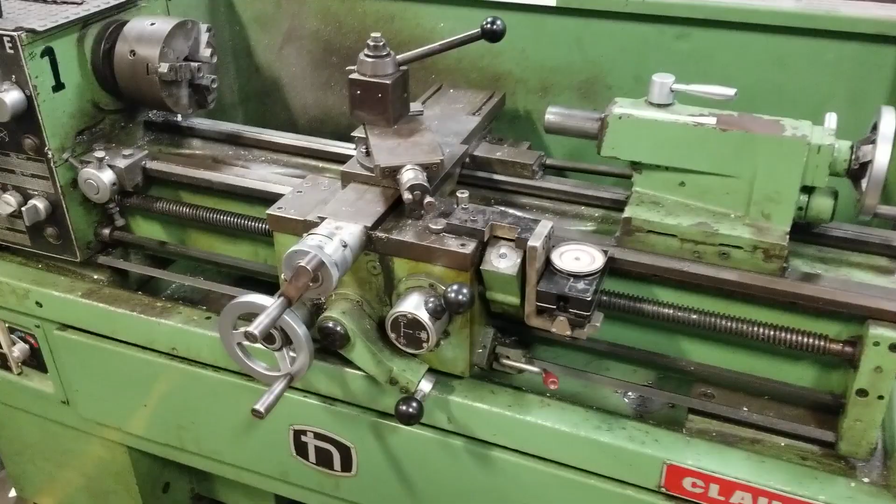Alright, we're going to start some lathe training today. It's really important that you know that these are dangerous machines, and no hoodie ties, even if they are tucked in. No gloves. Tie long hair back, not below your neck.

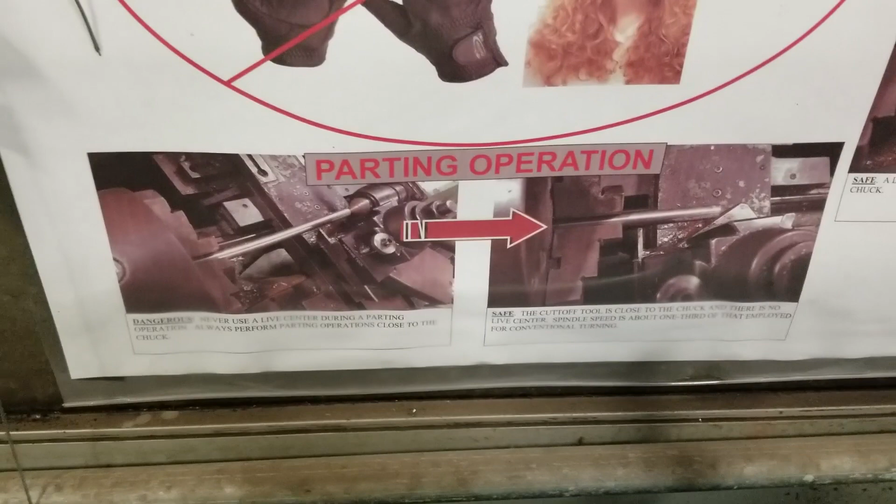Stop machines to remove chips and make adjustments. No earbuds, okay? So we have some other kind of safety warnings right here that you should read, as well as parting. Okay. All right, so it's very important that you constantly think safety. You know, long hair and hoodie ties could really cause a serious accident.

All right, so we have a handout here we're going to be looking at, and you should be trying to memorize the main parts of a lathe. We have 4 different ones. On day 1, you're going to be getting a demonstration from the teacher or a mentor, and then going through some of these pre-item checklist things.

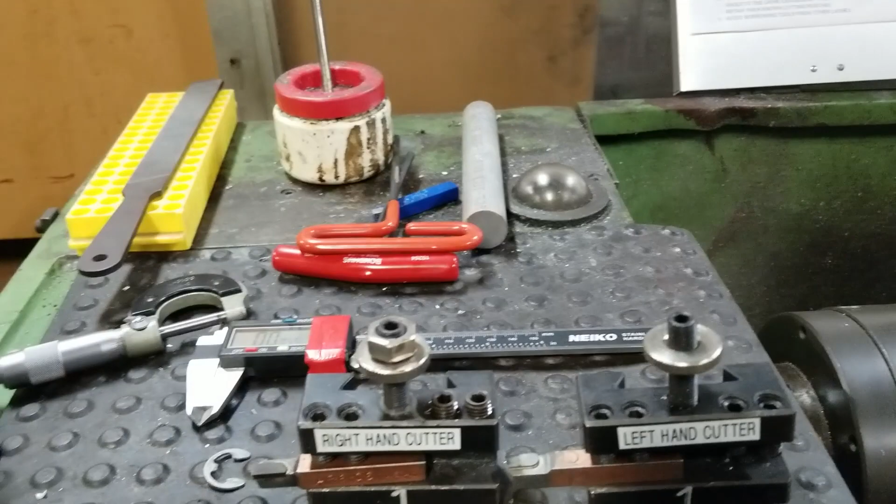One thing is we want to have sharp bits. I'm going to cover that really close. So the ones we're going to be using most is going to be the right hand cutter, also possibly the left hand cutter, the parting tool, and the chamfer as well.

So on this machine right here, there's a power button here, and if you push it this way, it's going to spin like this, and that's what we want to have happen. So I'm going to push it.

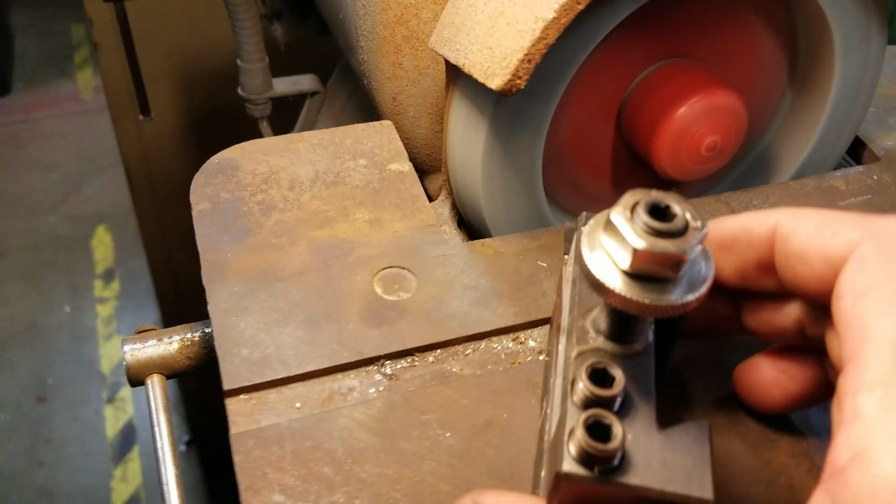You might have to do that more than once, but you want to keep the same angles. Don't make this point round. We'll have a different bit for that. Sometimes also, if there's some stuff on top of here, you can use the extra fine part of the file here and just file the top of this slightly, okay? But make sure you have a sharp tip.

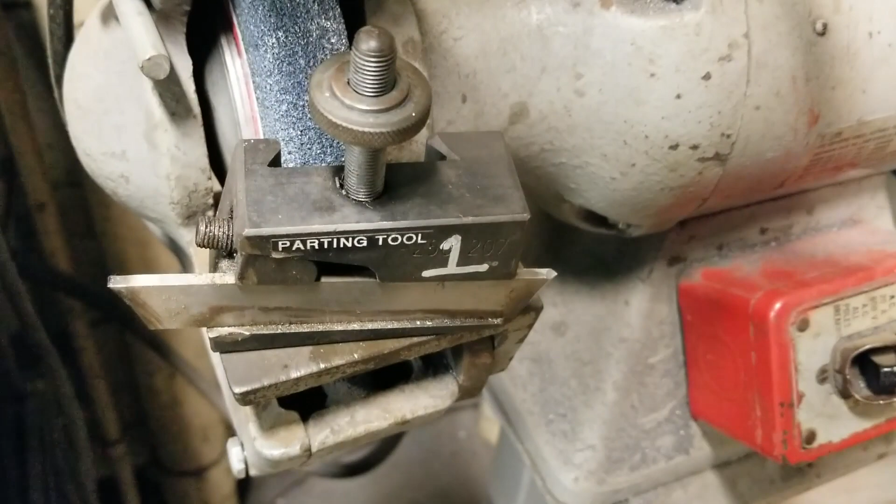On a left-hand cutter, you want to have the button go this way. So like that. Like this, and this side. Okay, here we have the parting tool.

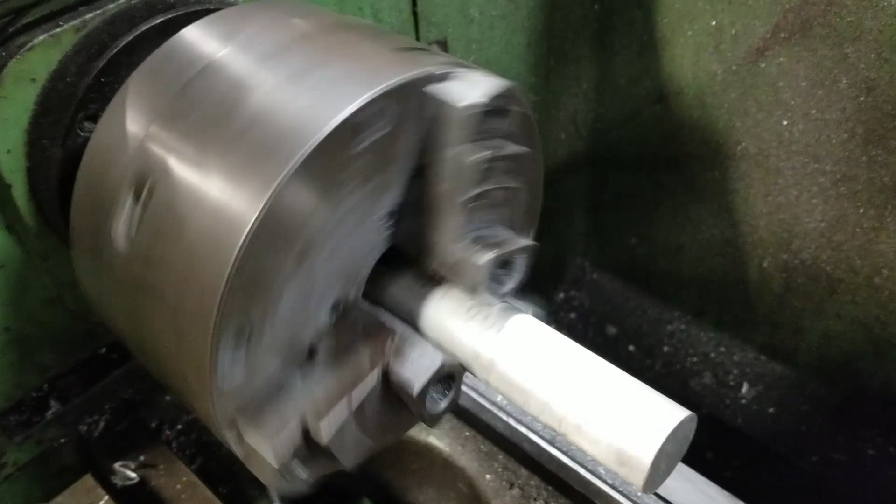And here's your work. This is a 1-inch thick aluminum 6061, and we're going to put it inside of our 3-jaw chuck like this. You want to go ahead and tighten it, and then you want to turn it and make sure it's spinning good. Okay, that's important. Watch this. That's bad. That's very bad. You're going to have an accident like that.

How far to stick out? You can stick out 3 times the diameter, no problem. But if you stick out more than that, if you're sticking out this far, then we have to support this side with a live center, something like this, or a steady rest, which we'll go over later. But always try and have your work be as close in as possible and your cutter close.

So we're going to go ahead and use a right hand cutter. So this is called the quick change tool post, and drop this in, and this knob right here raises and lowers this, and that's important. And you want the quick change post to be this surface right here parallel with this here. So don't have this be an angle. On this project, you really should not have to ever loosen this. So just keep this perpendicular.

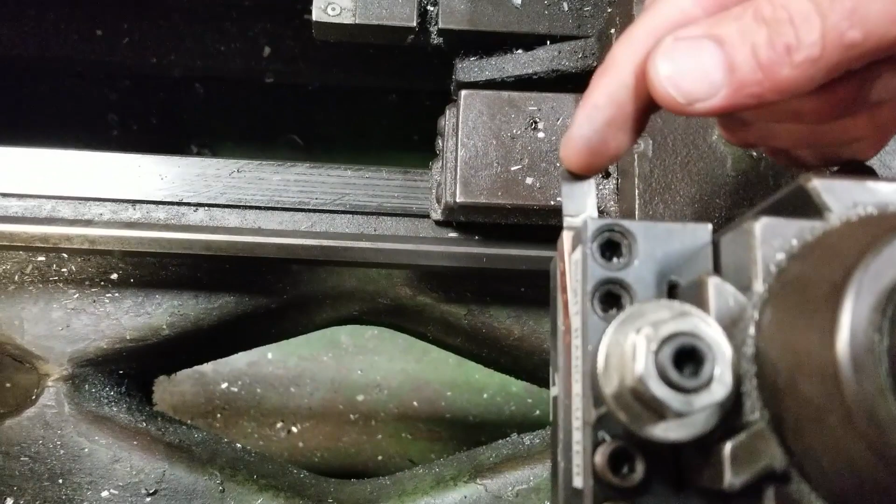And this cutter right here should be angled a little bit out like this, which you can see it is. It's going to cut perfect. So now we need to level out the tool. So I put in a straight piece of metal here. What you want to look at is: is this level? And the answer is no, it's not right now. So you're going to raise and lower this screw right here until it looks vertical. Okay, so that's good.

Once that is set, you want to take this and lock it in. So now you can see that by pulling this, this is locked in. This screw here is tight. The compound rest is tight. This bolt right here is tight, as well as this one right here. My work is tight. You spin it by hand and it's spinning good.

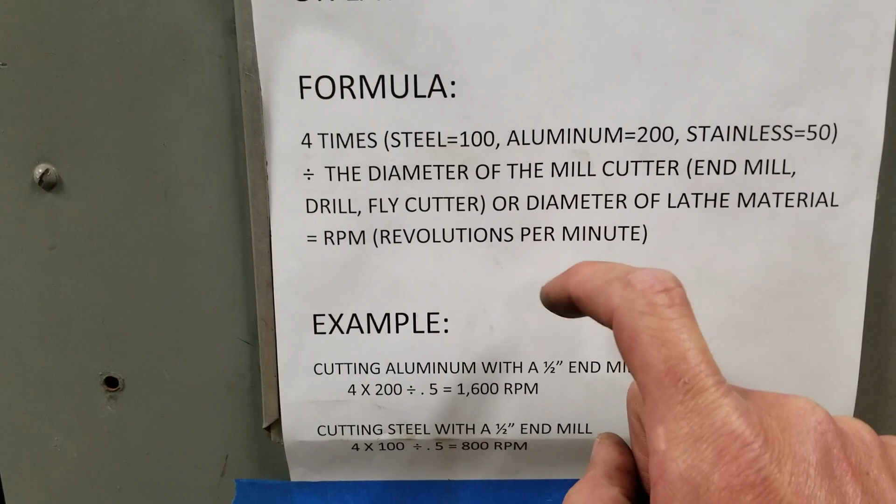Okay, how fast should you spin the machine? So we're going to go 4 times 200, and we're going to divide that by the diameter of the material. Okay, that's the speed you're going to cut at, and that's going to equal your revolutions per minute.

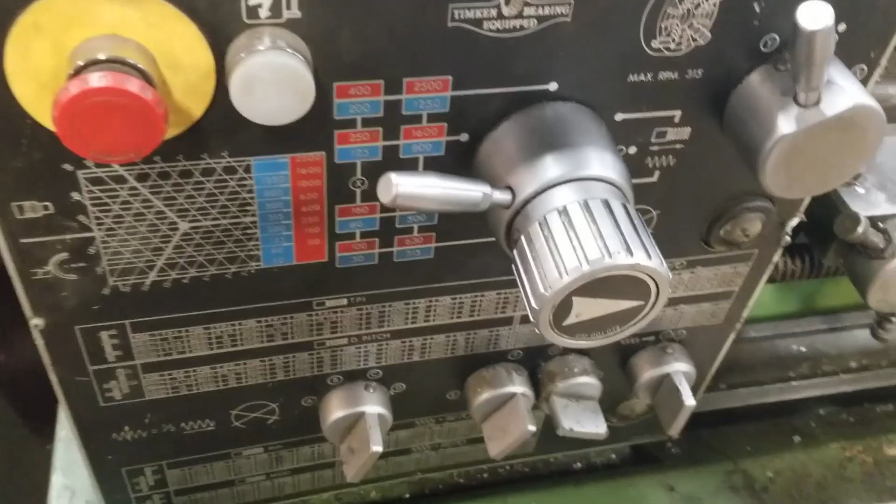Here's 2 examples here. I would say for almost the entire thing, we're going to always be spinning it in the forward direction. So this right here is forward. Sometimes, it's pretty rare, we might go in the reverse direction, maybe for doing some threading operations. As far as setting the speed goes, there's lots of numbers here for speed. So here's 800, and so I'm going to move this knob right here.

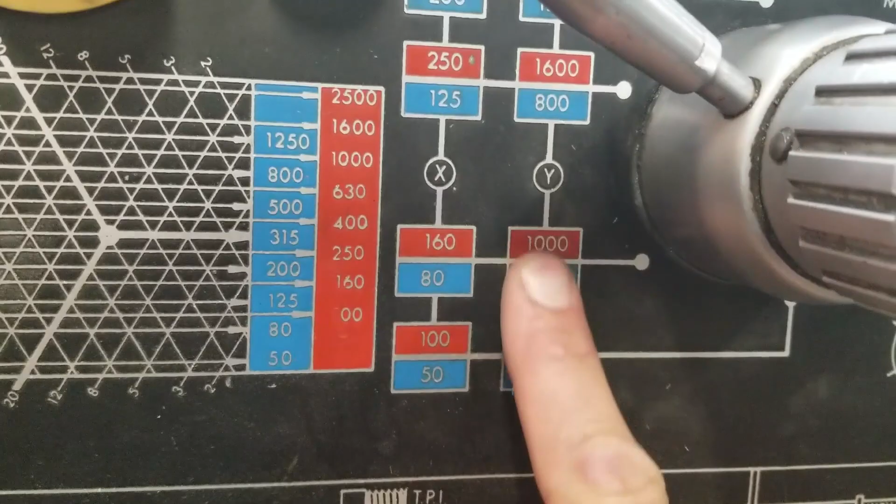Here's 800. I'm going to move this knob so that it's in line with it. And if it doesn't want to move, you might have to move the chuck a little bit. So it's an 800. You can see it says Y right there. And over here, it says Y. And so this whole column right here is Y. This one's X. And then you can see 800 is a blue number. And down here, we're in blue.

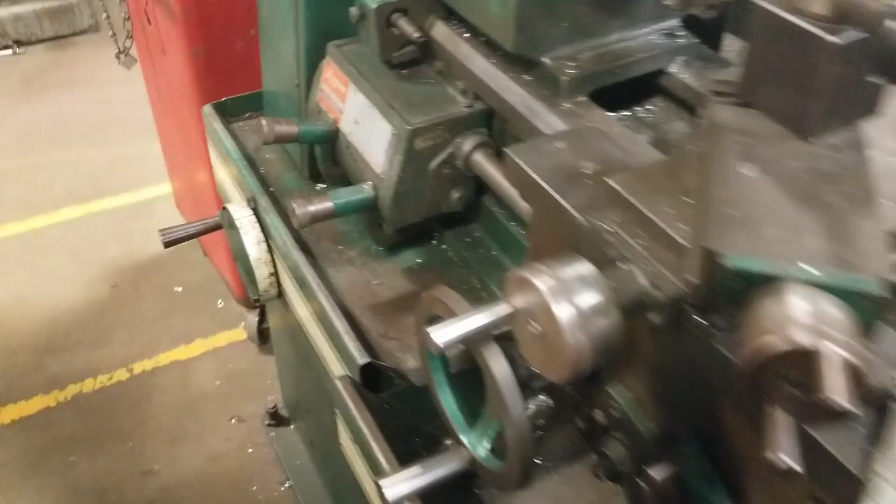And so on this machine right here, if we turn this knob down, it's going forward. Move it up, which you don't want to do, is reverse. So that's forward. Over on these 2 machines right here, you can see we have forward, reverse. You want to be on forward. The speed is changed down here while the machine is on, but these are worn out, so it's mainly kind of going by experience and how it sounds and how it looks.

On this LeBlond machine right here, we have forward and reverse. So I'll do forward. And then this is our on-off handle. Or down here, to change the speed, this is the number here. So if I want to go down, just let it do that back and forth for about 2 seconds. So if I want to change speed, that's it. That's how that works.

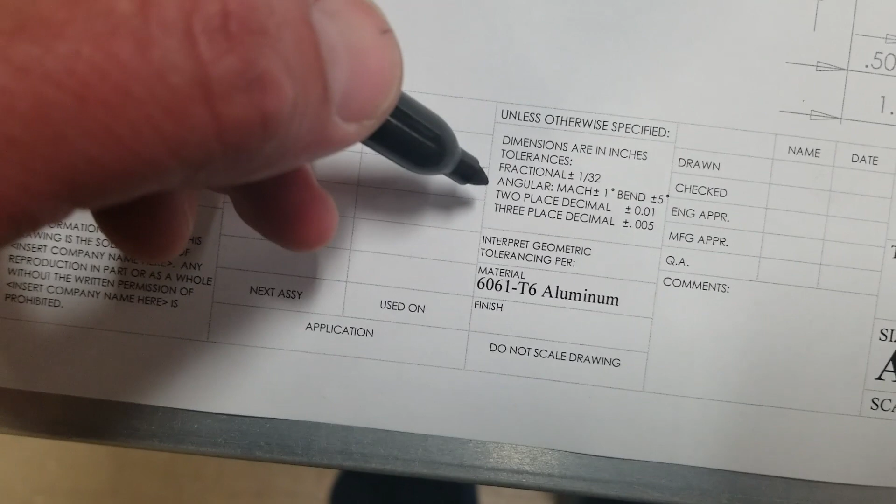All right, here is your project plan, your engineering drawing. And it's important with your dimensions, you really try and be accurate. Down here it tells you if there's 2 decimal places, you can be within 10 thousandths, 3 decimal places, 5 thousandths, okay? So the first thing we're going to do today is this cap, this cap right here.

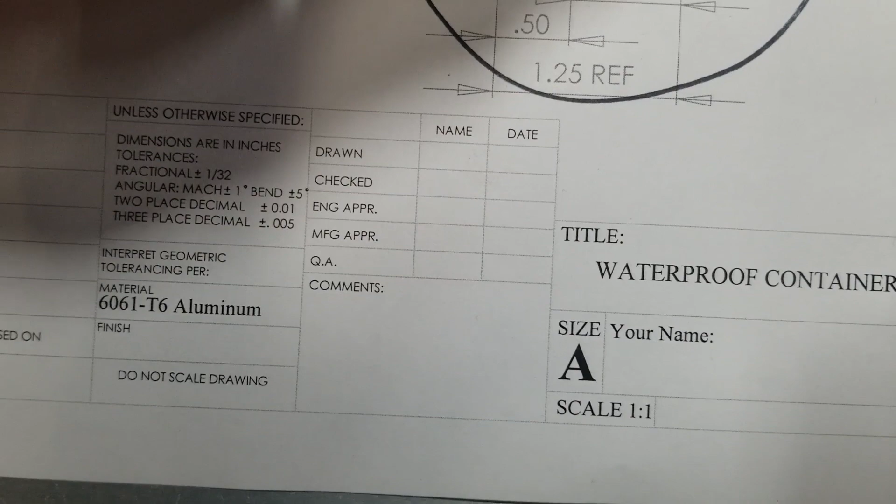And what's important to know is this right here, that it's 3/4 from here to here, and it's 3/4 thick. Okay, so it's 3/4 from there to there, and 3/4 from there to there, or we could say 750 thousandths. So that's what we're gonna make first, and you should go through these safety procedures each day. It's very important for your safety.

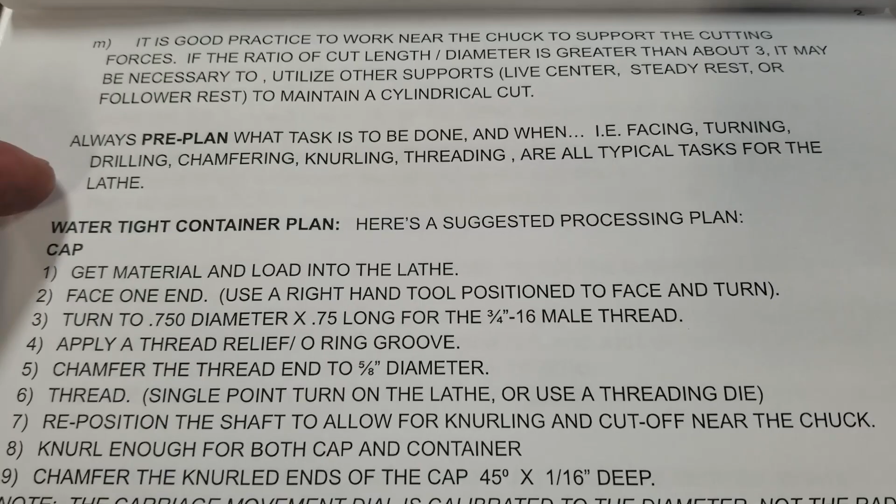All right, so we're always going to try and pre-plan what you're going to be doing. Get a plan, do your operations in the best order to get done the quickest, most efficient way possible. This here is a suggested plan for a beginner. It's not the only way to do it, but it's a good way. So we've got the material, and we're going to face one end with a right-hand cutter.

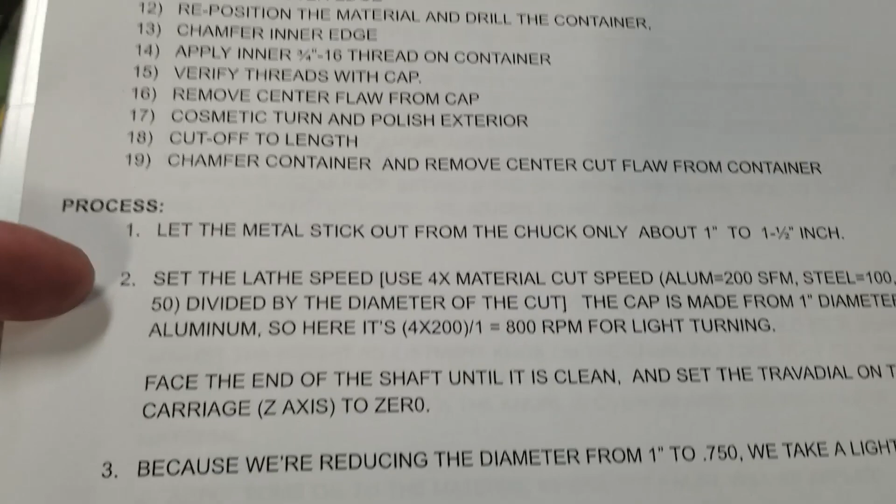And you'll notice that for each one of these main parts, down here is the process explaining exactly what to do. So if you read just this here, unless you're experienced on a lathe, you're not going to know what to do. So you want to read step 1 and then go down here to process 1. Okay, we did the speed. We're going to face the end of it until it's clean and set the travel dial to 0. So we're going to do number 2 right now. Okay, so here it is. And I'm going to turn the machine on.

So the end's done. So now with the travel dial right here, I'm going to go ahead and set this to 0. So what you want to do is move it until both dials are moving, the inner dial and the outer dial. First set the inner dial so that the black needle is at 0. And then move the other direction. So now the outer dial, the red needle is with the 0 there. Okay, so that's how that's set.

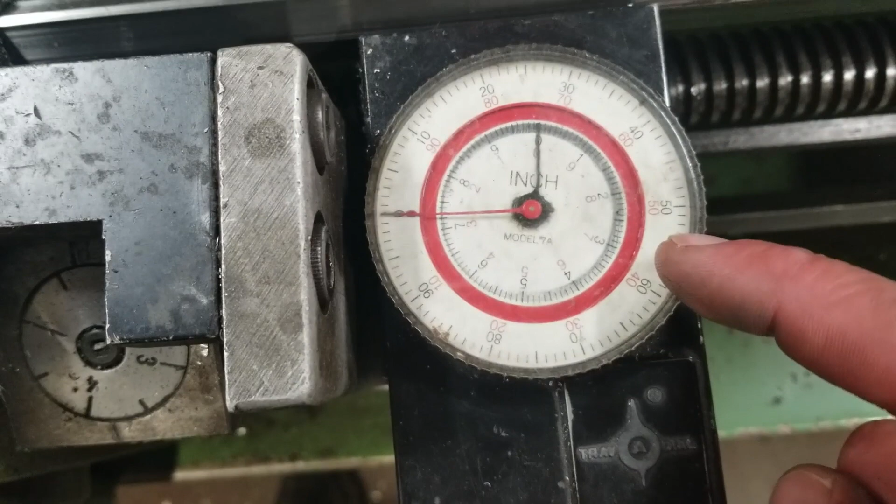On the outer dial, each mark is 1/1000th of an inch. On the inner dial, it's 1 inch between the 0 and 1. So if you need to go several inches, you could look at the inner dial to move quickly. Okay, so now I'm going to go ahead and back this out here. The travel dial is set. So now I'm going to move this knob right here over clockwise.

100 thousandths, 200 thousandths, 300 thousandths, 4, 5, 6, 7, 750, we're going to stop. 750.

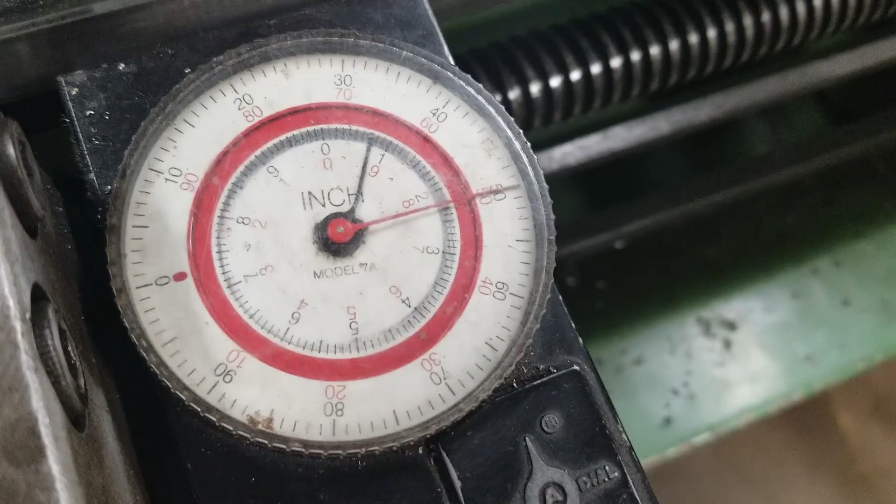So that's what just happened right there. Now what I'm going to do is not move this knob right here, so I'm going to loosen this little set screw. Without touching this—it's really important I don't touch this—I'm going to go ahead and set this guy at 0, and lock in this knob right here. Alright, so that's set at 0.

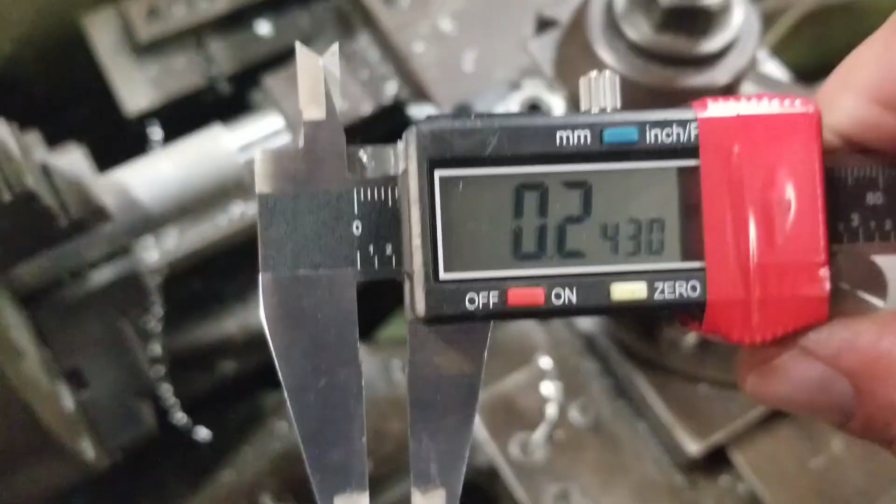That's important. So now when I move my work over here, alright, here's our digital caliper. I'm going to go ahead and turn it on, make sure it's in IN for inches. So that's fraction, millimeters, IN—that's what we want. We're going to close it, then click the 0 button if it's not 0. So that's zeroed. Now we're going to take a measurement.

So you can see I have 956 thousandths. Okay, so what I want to do is get to 750 thousandths. So, 0.956 minus 0.750 is 206 thousandths. That's how much I need to take off.

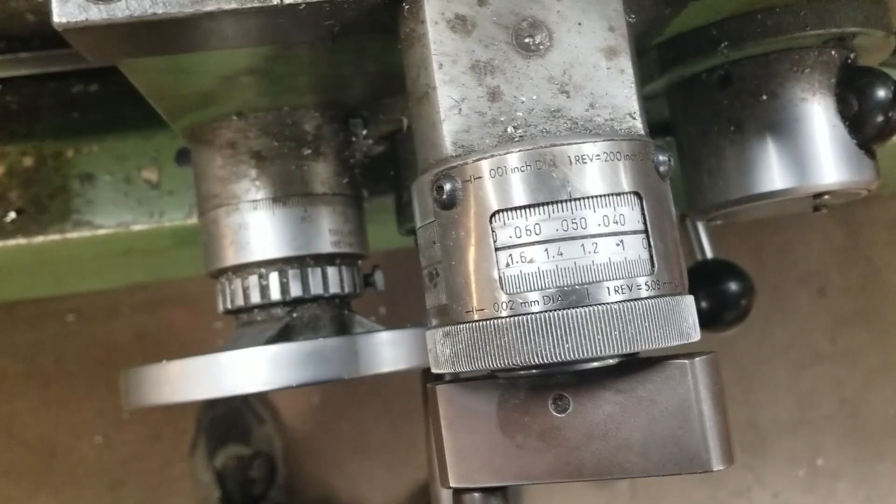Okay, so what I can do now is go in, let's say 50 thousandths, and do a cut. And I could go in another 50. Could go in more, less—just kind of getting a feel for it.

So now we'll stop and take a measurement here. I've gone in 150 thousandths, so I should have about 56 thousandths more to go. Let's go ahead and just see. This is saying—because the dials here aren't always perfect, it has to do with how soft your material is, the machine, the force, the speed, a bunch of things—but it's saying right now I'm at 806 thousandths, so I have to take off 56. You can see it's pretty good.

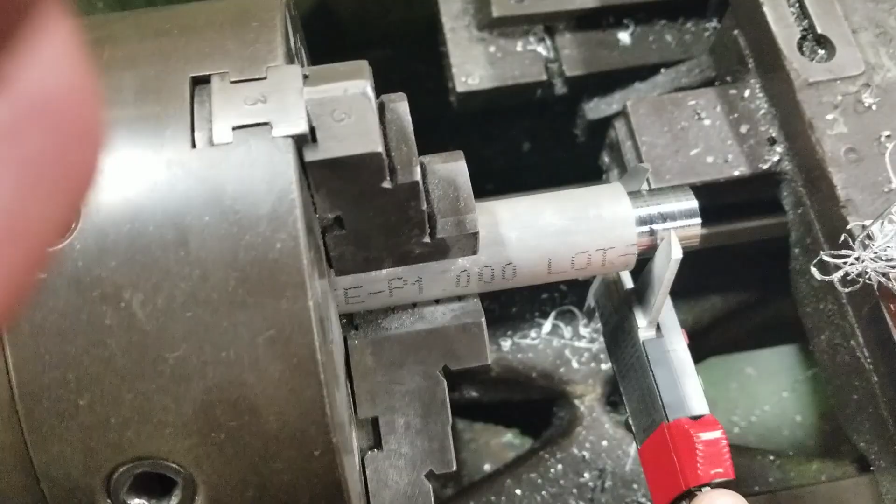We want our finishing pass to be taking off just a couple thousandths, so keep that in mind. So I have to take off 56 thousandths, so I'm going to go ahead and take off 50. Just to be safe, I'll do another measurement because I really want to get this guy at 750. It's saying I have 9 thousandths to go here, so I'll do about 6 or so.

Alright, so basically you can do this. Had a nice finishing pass there—I just took off a few thousandths. Got 5 more to go. Alright, so I'm really close here, just have about 2 thousandths to go. Alright, and we got it right there.

Okay, I've put in a sharp parting tool, and I made sure again that this piece of metal is vertical—it's really important here. Alright, so we're on page 2. We did all this right here. Now we're on step 4. I'm going to go ahead and mount a parting tool. We're going to do an O-ring groove to 625 thousandths.

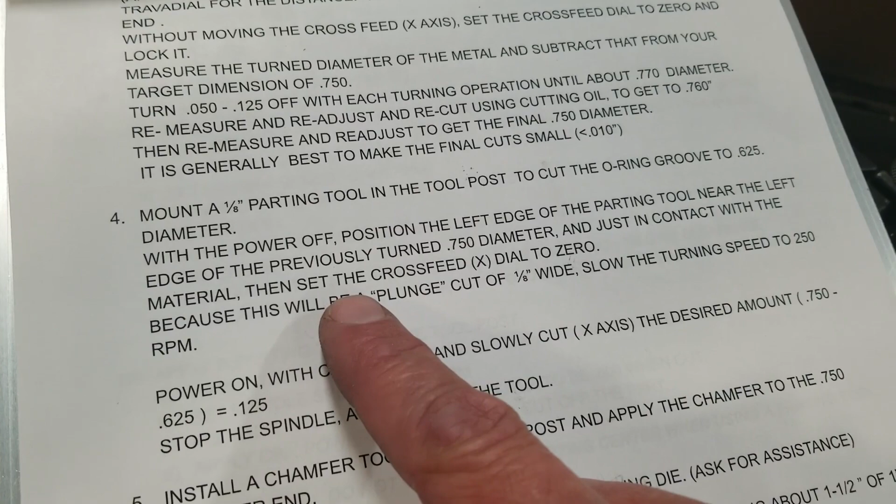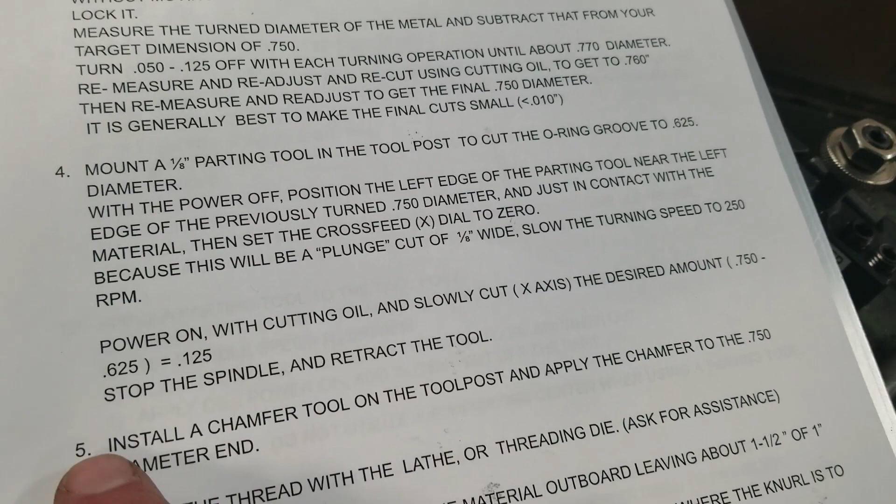So as far as getting the machine down to a lower speed, this machine is really pretty easy—just got to find a number that's around 250. I see it right there. Okay, I'm already in the right position there. You can see it's in the X there, so I have to go over there. So that's X, and you can see that the 250 is a red number, so I have to go to the red number.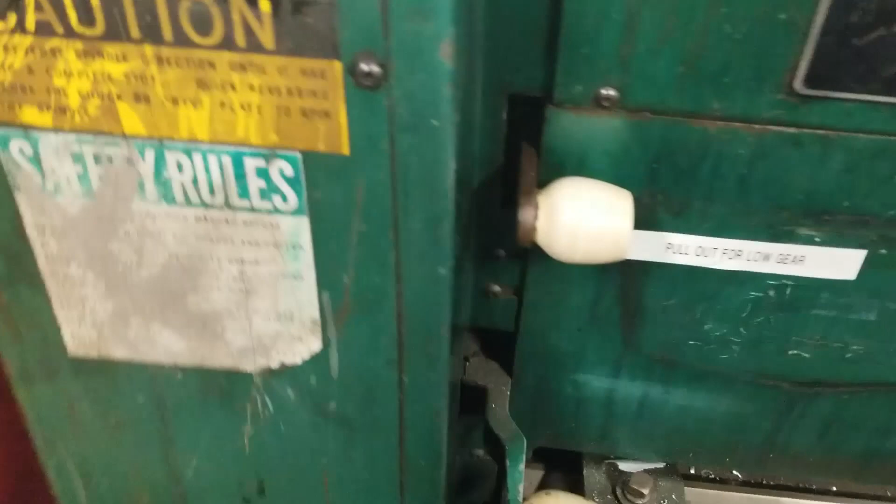On these two machines right here, what you have to do is, back here, there's some pins, and you have to pull these pins out. So the pins are out, and now it says pull out for low gear. So pull this out, and now we're in low.

Alright, so I've got this parting tool up against my metal with the power off. I'm going to find my set screw here and set this guy at 0. So that's set at 0. At this point I could go back a revolution, and if you have some kind of a little bit of an angle right here, you're going to go ahead and try to get rid of that angle.

So again, the tool is in tight. The tool is in tight. Could use a little bit of cutting fluid right here. And we're going to go in 125 thousandths. And back at 0—so I'm going to go in here.

If you want, we could just go ahead and take a quick measurement to get the right desired diameter. All right, so we've gone in just about 125 thousandths, measured it, and it's right there. So that's what you want to do.

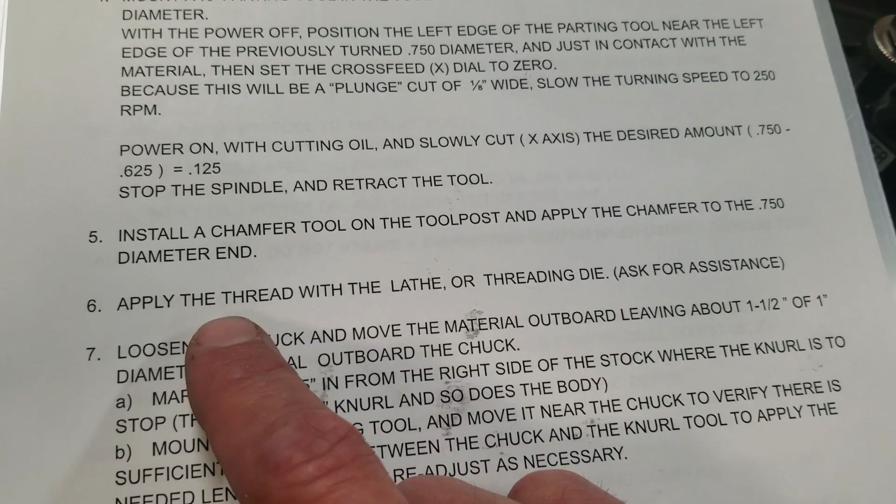Get that at 625 thousandths for the O-ring groove. Now what we're going to do is install the chamfer tool in the tool post and apply the chamfer to the diameter end. Then we're going to apply the thread with the lathe or threading die.

Just look at the plan here. We know that we have a 1/8 inch parting tool, which is 0.125. It says here, O-ring groove 1/8 parting tool, diameter 625 thousandths. So that's what we did. And we're going to apply a chamfer on this end right here and then cut the threads.

All right, I have the chamfer tool installed. It's locked in, it's level, and basically it's right here. We're just going to go in. Also use the cross feed here too.

Alright, so a chamfer basically takes the sharp edge off the metal. In this case, we're going to be putting a die on here. It's going to help it get started more easily than if you didn't have a chamfer.

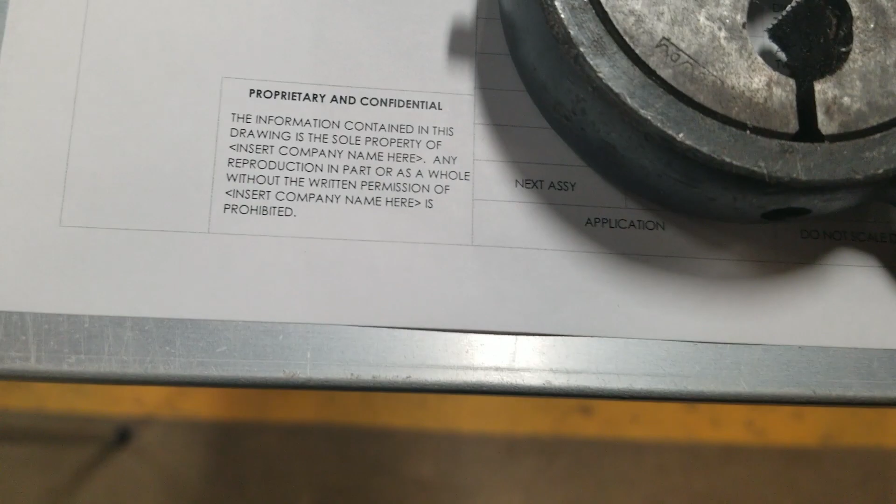Now here in the plan it says 3/4-16. What that means, you want to have the diameter of threads be 3/4, and then there's 16 threads in 1 inch. If you look at this die right here, it says 3/4 right there, national fine, and then 16. So this is definitely the right one. Look at it too. You can tell that in this area right here, it's going to first get the threads started, and then towards the second half, it really cuts real threads.

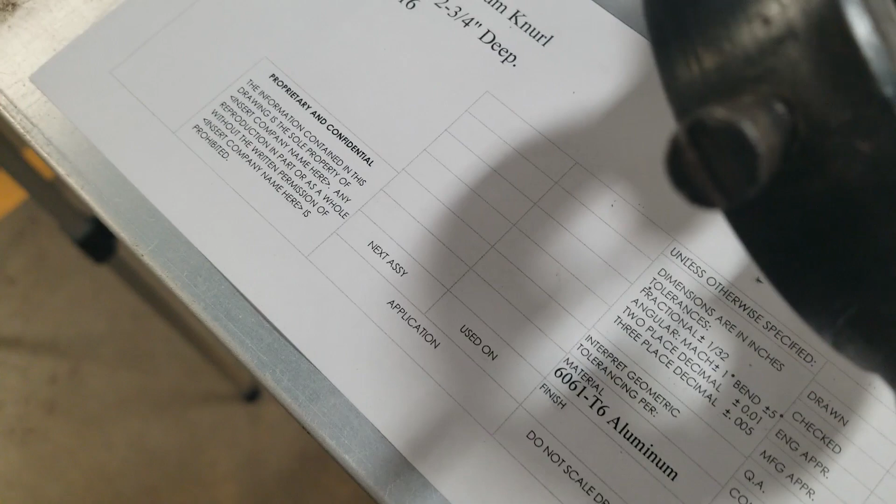So we're going to have our end touch this side. Okay, so what I've done here is I have the die set up here. This is called the tailstock. I had to loosen this, move the tailstock over with my hand. You want to have this loose. On this tailstock, this is what tightens and loosens it. So you'd move it over, tighten this, make sure this is just a tad bit loose so this works right here. And then on this tailstock, there's a button down here that locks it in, unlocks it, and then this should be a tad bit loose.

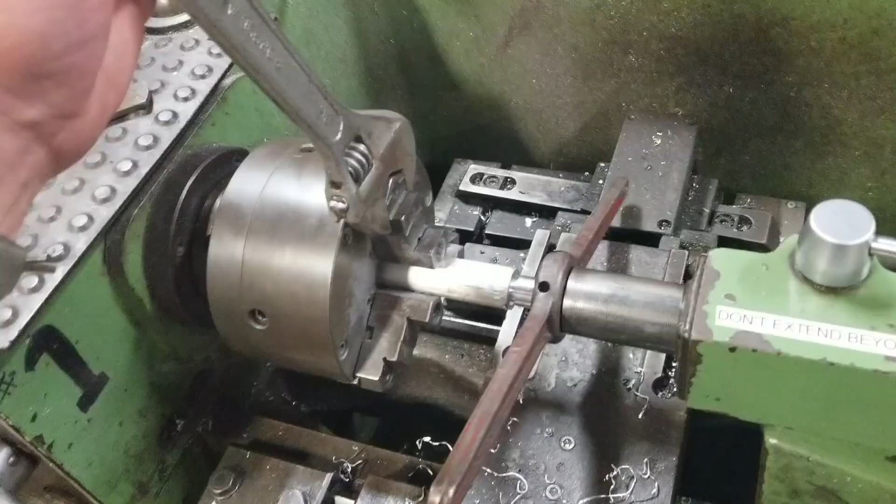All right, we're going to cut the threads now. It's going to be a little hard to do this one-handed, but before we start, it'd be a good idea to get some cutting fluid on that.

And what we want to do this whole time is maintain a little bit of pressure with this going this way, so this is going to keep it. We want this to be a little bit of tension there. And then we're going to have an adjustable wrench going here, and we're going to cut the threads a little bit like that, and then a little bit of tension. Cut threads, and then a little bit of tension.

Now, after it gets started, it's going to take more force. So I'm going to cut the threads, and then you want to move it back up here to release the threads into the flutes of the die, get back where you started, and then apply a little bit of pressure right here, and keep doing that.

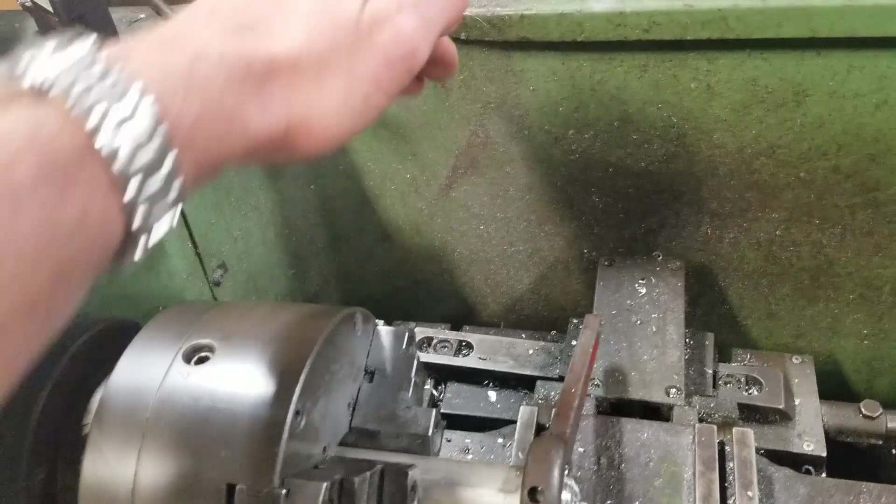All right, I could just feel myself going past the O-ring groove, and now really I can't go anymore. It's stopped against that edge. So now I'm going to back it out. What we're going to do is pull this back, take the wrench off, and then you might be able to use your hand, but basically we're going to just move the chuck this way and reverse with no power and get it off.

All right, so you can see it's coming off here, just like that, no power. All right, here's what it looks like. To clean it up a little bit, but basically I got my threads done.

On your next lathe project, or Metals 2, we will basically cut the threads with a thread cutter, and that's why all these numbers and stuff are here, because if you want to do a 3/4-16 thread, you can set these dials so the machine will do that for you. But that's for a different lesson.

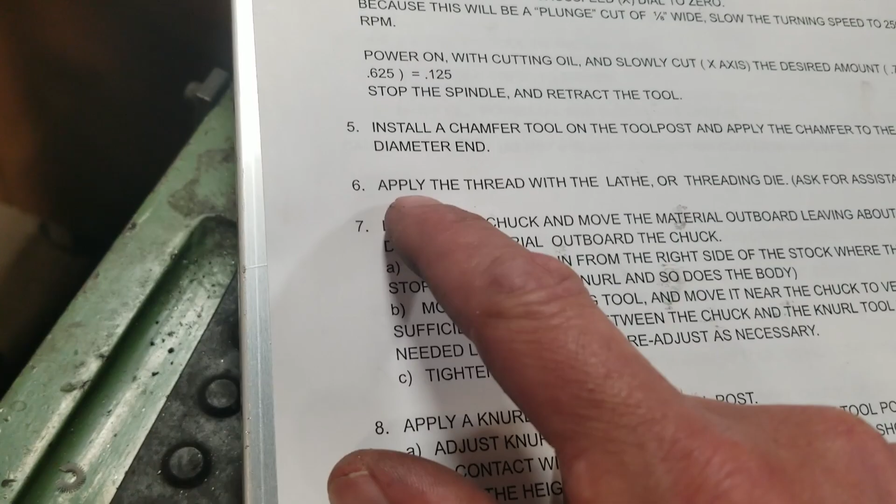All right, so we just completed step number 6. If we're going to 7, let's just see where we're at. This is kind of talking about knurling. So you can see that we've basically faced it, we turned it down, we did the chamfer, we just did step number 6. So now we're on step number 7. We're going to reposition the shaft and do our knurling. So here we are, step 7.

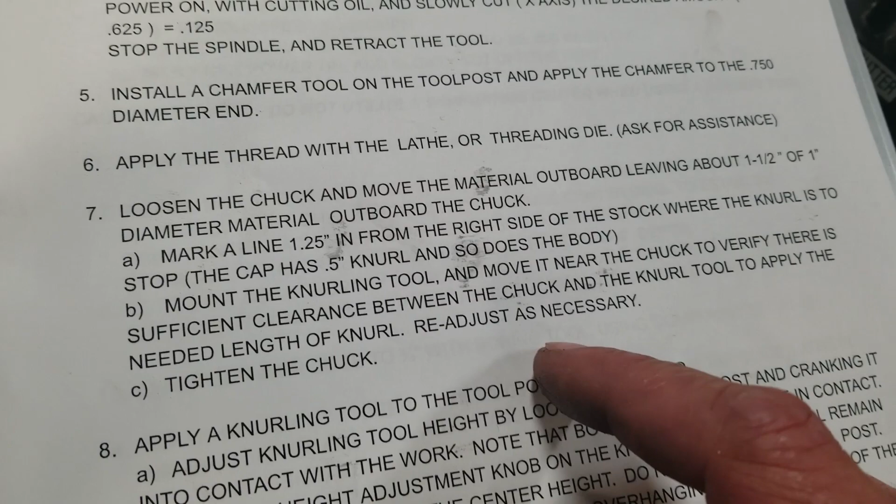So basically loosen the chuck and move the material outboard, leaving about 1.5 of 1 inch diameter of material outboard the chuck. But let's pause here. We're actually going to want to do a 1/2 inch of knurl here and a 1/2 inch here, so that's 1 inch of knurl. We'll have to part them, that's 1/8 of an inch. So we're actually going to knurl 1.25 inches of knurl. That's what we're going to do, so we can get both done in one operation.

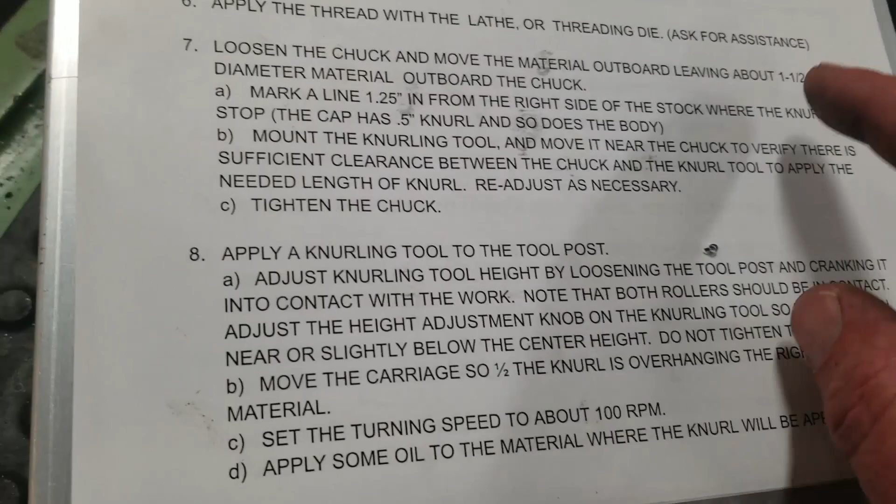Alright, so going to have about 1.5 inches out. Like it says, we're going to knurl about 1 1/4, make a little line, and mark a line 1.25 inches from the right side of the stock where the knurl is to stop. Mount the knurling tool, move it near the chuck to verify there's sufficient clearance between the chuck and the knurling tool, and apply the needed length of knurl. Readjust as necessary, tighten the chuck.

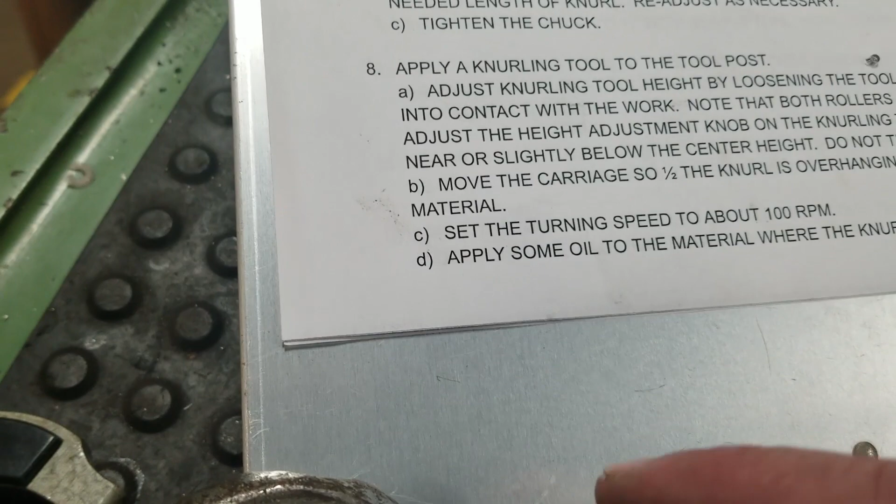So we're going to go through this step here. We're going to go about 100 RPMs and use cutting fluid. Alright, got my knurling tool in. Set this at about 1.25, and just go ahead and scribe a line like that, so you can see my line right there where I'm going to go to.

As far as the knurling tools go, you don't want to have this hit the chuck. That would be really bad. So basically, I'm at the knurling tool, the left edge into the line, and I got a little space between the chuck. You definitely want that safety space. Don't have it be where you're going to be any closer than that.

And right now, if you want to know how far mine is sticking out here, it's approximately 1.76. So you could say have it stick out 1 3/4. That way you have a little bit of space right here, because you don't want to be too close right there.

Alright, now with the knurling tool, what you want to do is the tool should be loose right now. So it's loose, and we're going to drive it in, and it's going to find the center. See that? It found the center.

And then you can verify that both wheels are moving. So you can see the top wheel is moving, and then the bottom wheel is also moving. It's a little hard to see, but you can see the top wheel and the bottom wheel are moving.

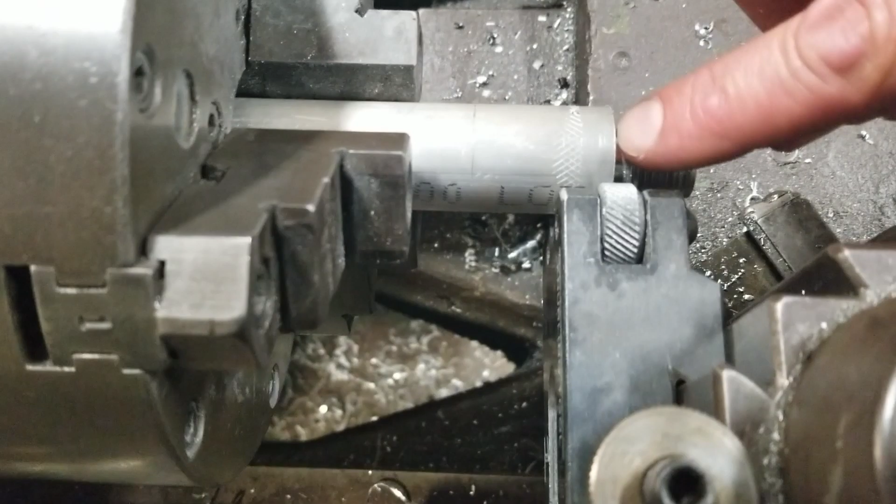So we're going to get... okay, I have the knurling tool in. The knurling tool is about halfway over this edge here, about halfway. And I went clockwise until it was touching. I verified that both wheels are moving, and I got this thing set at 0.

We're going to be using some cutting fluid, and we're going about 100 RPMs. So I'm going to go in about 30 thousandths here. Take a look. And then I want to hold this knob and then hold this in place with my right hand, my left hand, move this knob over.

Alright, so I have my knurl there. If it has the cross hatch, you know that both wheels are working. If you only see the lines going just this direction, then you have to do it over again because both wheels weren't moving. And I could go deeper there. You know, I'd say go 30 thousandths to 60, somewhere in there.

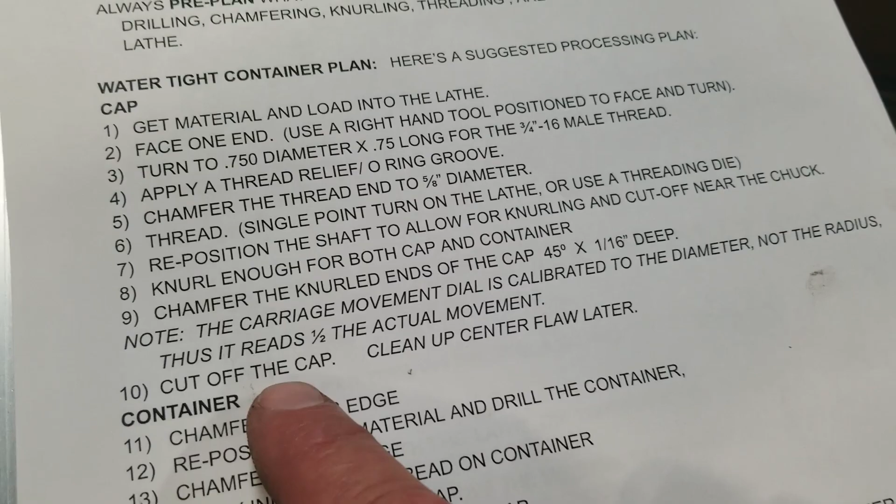So with the knurling, be sure that you and your partner really read this, it's really important. And then it goes on to the next page right here. So we did all this right here. Now we're on to step number 9, which is to chamfer the knurled ends of the cap, 45 degrees 1/16 deep, and then we're going to cut off the cap. So we're going to do steps 9 and 10 now.

Okay, we have a sharp chamfer tool installed. It's level, it's locked in, it's right just touching the metal, and this is set to 0. The travel dial is set to 0, and we're going to go in 1/16 of an inch or 62 thousandths.

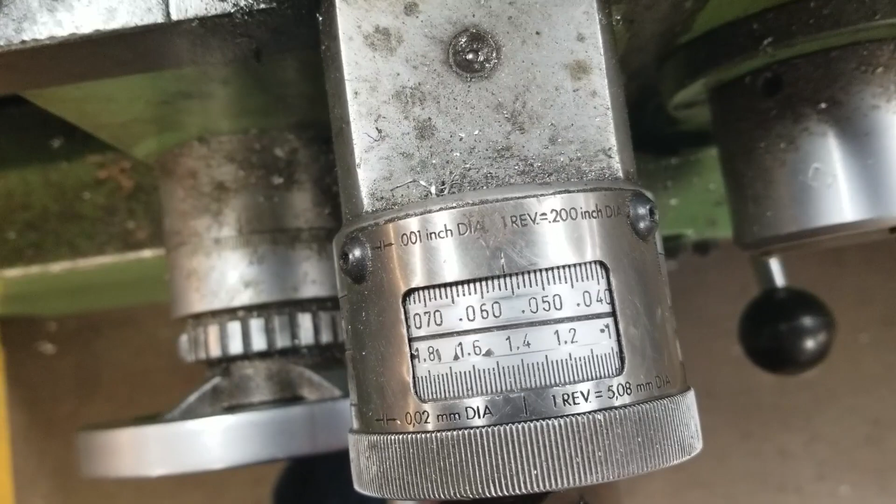After that, I'm going to go ahead and here I'm at 0. I'm going to also back it out a full revolution, so we're a full revolution away. And now we're going to go over 1/2 of an inch. 1/2 an inch is 500 thousandths. So we're going to go, that's 100 thousandths, 200 thousandths, 3, 4, and 5, right there. So now I'm going to go in a full revolution to get back where I started from, and then we're going to go in 62 thousandths.

Okay, so we're on step 10. Got 250 RPMs. We're not going to use anything supporting the right side of the metal. It's time to have our cap fall to the ground. We're going to do that using a parting tool. It's sharp, it's level, it's locked in, and the right edge of the parting tool is basically at the bottom of the chamfer, the bottom of the V. We're about 250 RPMs, and we're going to use some cutting fluid. We're going to basically have the cap fall to the ground.

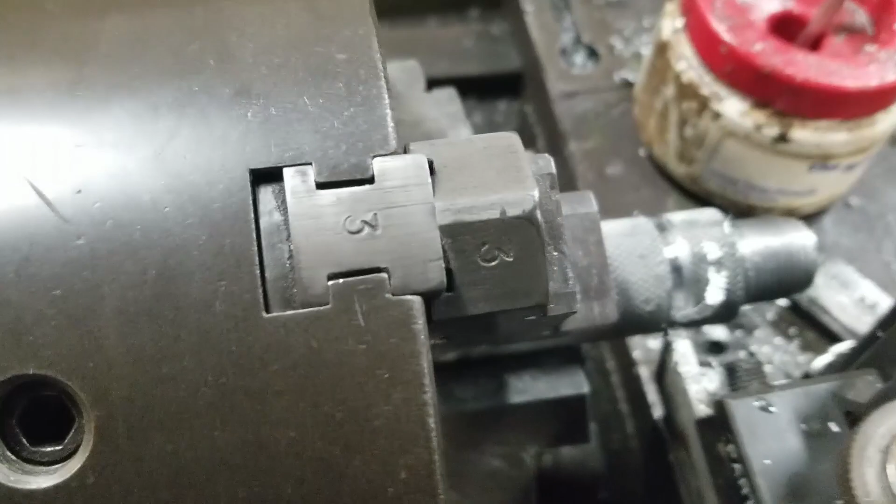I'm just going to pause here and make sure I still have my chamfer. If for some reason you made a mistake and got rid of your chamfer, you could change out the parting tool right now, put the chamfer tool in, and get that chamfer back on the left part of your cap. But it's going well for me, so I'm just going to proceed.

Perfect. You can see it fell down there, and that's exactly what we want to have happen. Had we been supporting the right side, it could have flown up and been dangerous.

Let's get our cap. Here it is. Might be a little hot. So here's my cap, it's done. And it has a little tiny knob there. That's not a problem, we'll fix that later.

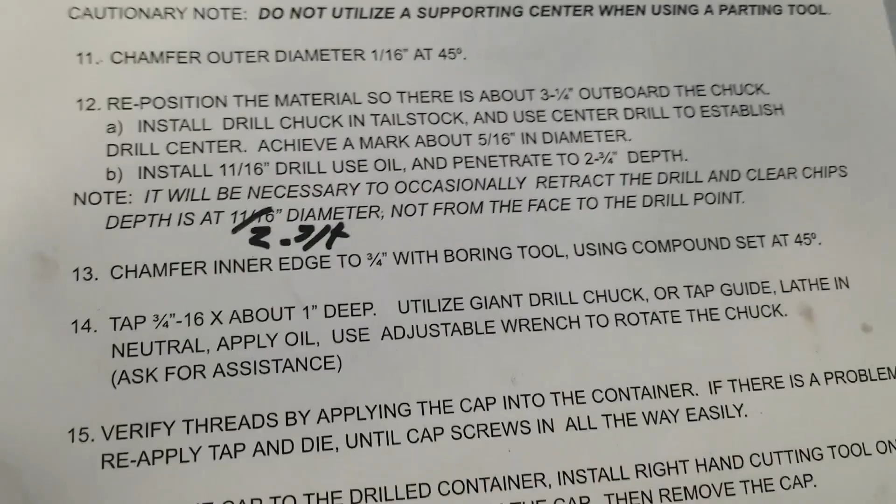But that's done. So now we're on step 12 here, and we're going to be basically having it stick out at least 3 and a quarter inches, maybe up to 3 and a half. You can see I have a mark here at 3 and a quarter, I went a little bit beyond that, but not too much more. And basically what we're going to do is use a center drill.

We're going to go in about 5/16, and that'll get the hole started with a center drill. Then we're going to drill with an 11/16. You can choose to do a pilot hole as well, and we're going to go to a depth of 2 and 3/4. So looking at our plan right here, it says drill 11/16, 2 and 3/4 deep, then tap it with a 3/4-16 tap.

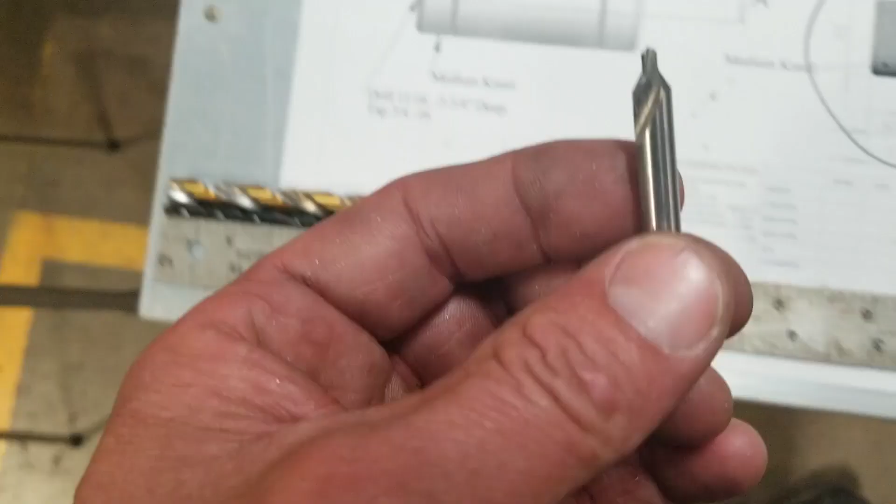As far as a center drill goes, this is a center drill. It's used to start a hole, find the center. It's a very stiff, robust type of drill called a center drill. I'm going to start with that.

Then with a pilot hole, it's important, if you do one, that you select a good sized drill. If you selected this number 11 drill, it'd be a mistake, because you can see the drill stops drilling there about 2 and 1/4. So once you got to 2 and 1/2, the chips could not escape and the drill bit would snap inside your part. So that'd be a bad choice. This larger 5/16 drill, you can see that it can drill a little over 3 inches, no problem. So going 2 and 3/4 would be fine for this guy.

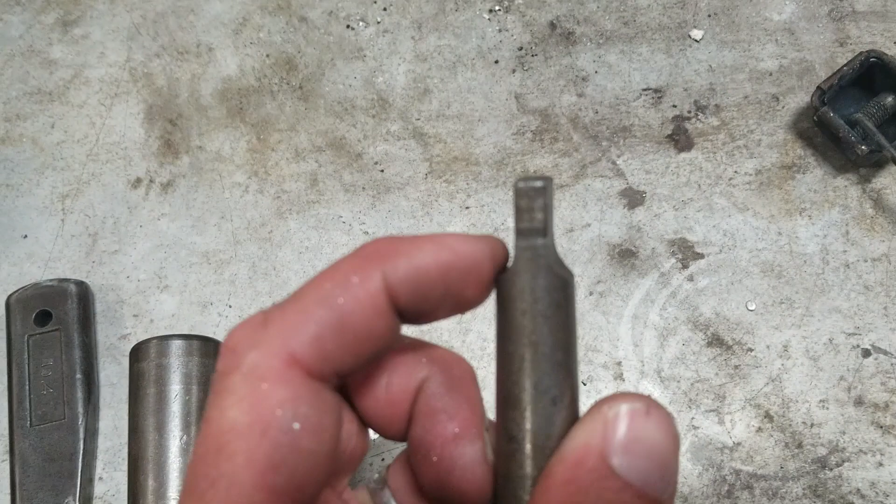With our 11/16 drill, this one is a tapered shank, meaning that it's thicker here and thinner here. Plus it always has this tang here, so that the drill cannot slide out in the chuck. So it's a tapered shank drill, and you're going to need an adapter for our lathes. You're going to need this adapter for 3 of our lathes, and then if you're on the LeBlond, you'll need this one, the bigger one. The way these work is you just put this in, and you rotate it until that locks in there like that. If you have to get the sleeve off and you can't do it with your bare hands, this is called a drift, and the drift is meant to go inside of here to push it out. So that's one option. We have one of these drills.

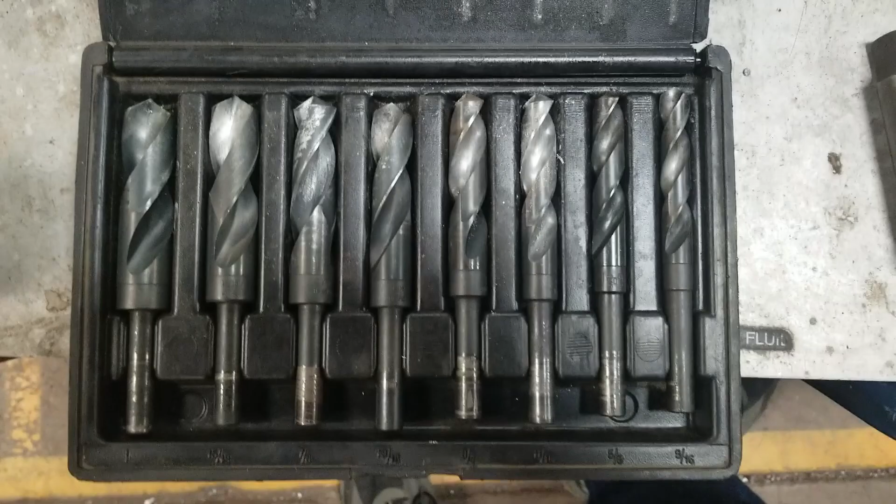The other option is using a straight shank drill. And so if I grab the 11/16 drill, you can tell that this is not tapered, it's a straight shank drill. If you're using a straight shank drill, you want to install the Jacob's chuck, which has on the back end of it a tapered shank, which will be up here. And then you want to install your straight shank drill into the Jacob's chuck, tighten it, and then go ahead and tighten it with the chuck key. That's how you would get that in.

So we're going to go ahead and start with the center drill. Right, I'm up at about 1,000 RPMs. That's about what a center drill would run at. So everything's ready.

Remember that for this to work, when you're doing this, the tailstock has to be locked in, and this also has to be just barely loose. That way this thing will work.

Okay, so now I got a 5/16 drill in for a pilot hole. We want to go in 2 3/4 deep exactly. So how do you do that? Well, here in the tailstock there's a ruler right here, and we want this to be out 1 inch or more to be stable. Otherwise, if it's not out a full inch, this thing can be jiggly and not set. So I'm going to have this be out exactly 1 inch, right there.

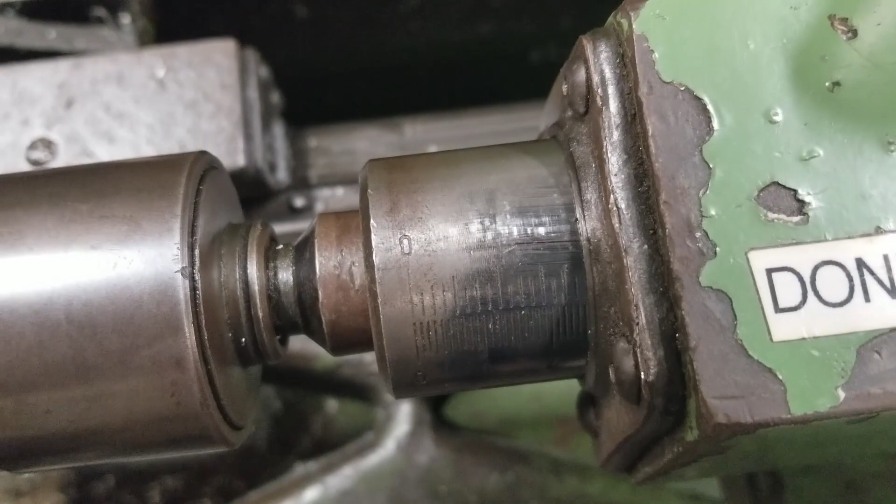So you can see, I'm trying to get the camera here so you can see it. We're out 1 inch. And then we're going to move this thing to where the tip of the drill is right there. Then we're going to go ahead and lock this in. I'm going to crank until I get to 3 3/4, because it's out 1 and I want to get to 2 3/4 deep. It's already out 1, so I'm going to go ahead and start drilling.

Occasionally make sure that everything is clear.

Alright, so I could put the final drill in like this, or I could take this out and put in a tapered shank like this and make sure it's out 1 inch exactly. Move it on over. Lock this in. Now keep in mind, this is going to be pretty hot, so if you take this out, just know it's going to be hot.

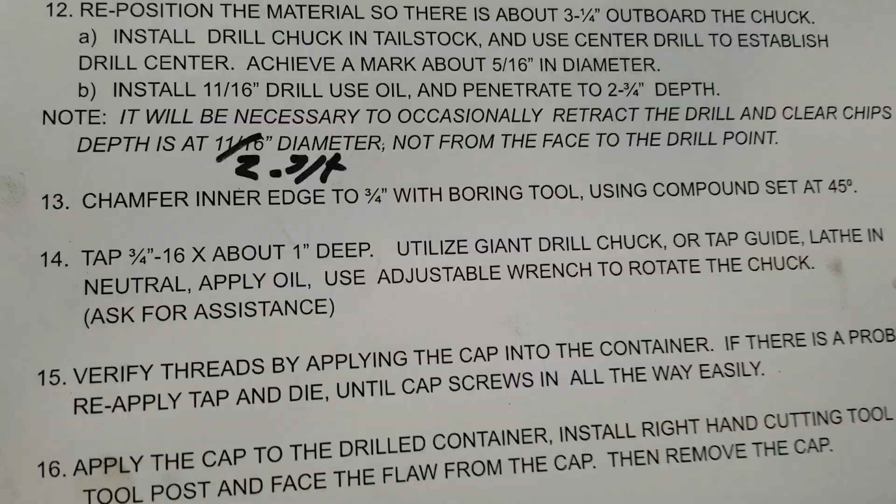Step 13 says: chamfer the inner edge to 3/4 of an inch with boring tool, using compound set at 45. So what that means is that this is the compound. I've loosened a nut here, and either on this side or this side, depending on the lathe, there's going to be some markings so you get the degrees right. You can see right there, it's set at 45 degrees, so I have these tight. That's important. And then I have the boring tool in, and you can see I have the height adjusted correctly.

Alright, so the boring tool is used to take off metal on the inside, and it's set up right there. Right now I've got the tool locked in, centered, everything's tight. I'm going to go and turn it on. I'll move this one right now.

Then take a measurement. If you want to take more off, what you're going to do is go a few thousandths this direction and then back in here like that. If you want to take more off, you can go ahead and turn this out and go in more here.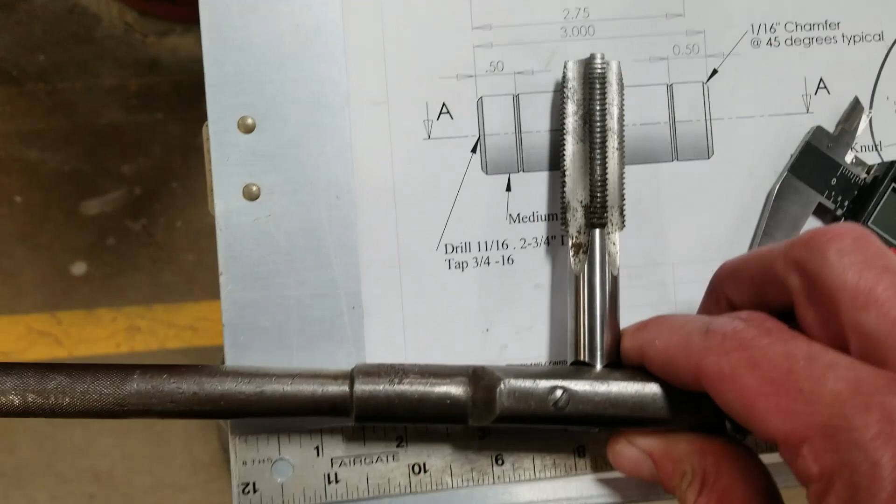We just did our little chamfer on the inside there. A couple things to note: with our particular tap, it doesn't start cutting real threads until right about here, so that's why we're going to go in a little deeper. This section right here is about 0.3, so 0.75 plus 0.3, so we're going to go just over an inch, and that way we'll have 3/4 of an inch of real threads. Alright, this is called a tap guide.

There's 3 of them in the wooden cabinet, and there's a spring on this. As opposed to just throwing this in a vise and doing a tap, it's much better to do it on the lathe because you can keep everything lined up. So we're going to have this here and the tap guide right behind it. Alright, I'm going to go ahead and engage the spring a little bit, going like this to make sure that spring is engaged.

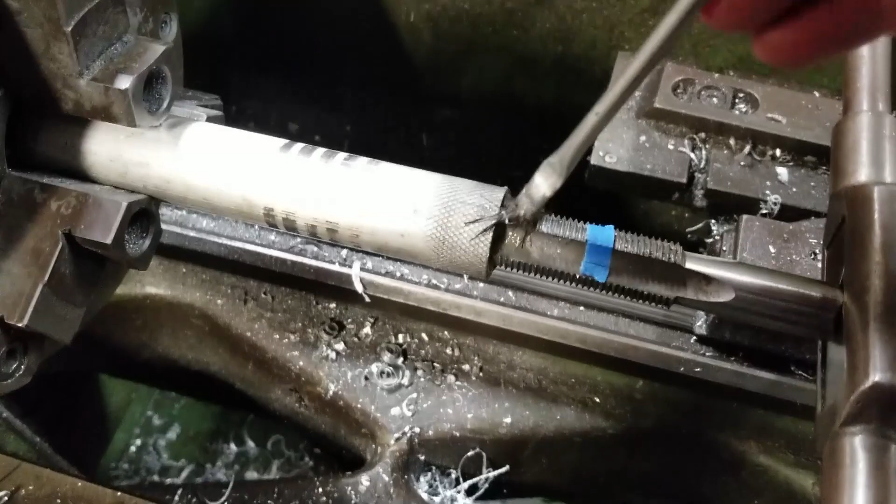Again, the tailstock is locked in, and we could just use a little bit of cutting fluid. We're not going to use any power at all. Basically we're going to go ahead and just spin it like this by hand. Spin it by hand. Now it's getting kind of hard.

It's going to start cutting real threads. So then, just like with the die, we're going to go ahead... I got that blue piece of tape there so you can kind of see where an inch is. Alright, got it tapped in there just over an inch.

I'm going to go ahead and move my tailstock away, and then I'm going to go ahead and just turn this counterclockwise, and don't let the tap fall to the ground. It should come right out here. Alright, tap will come out.

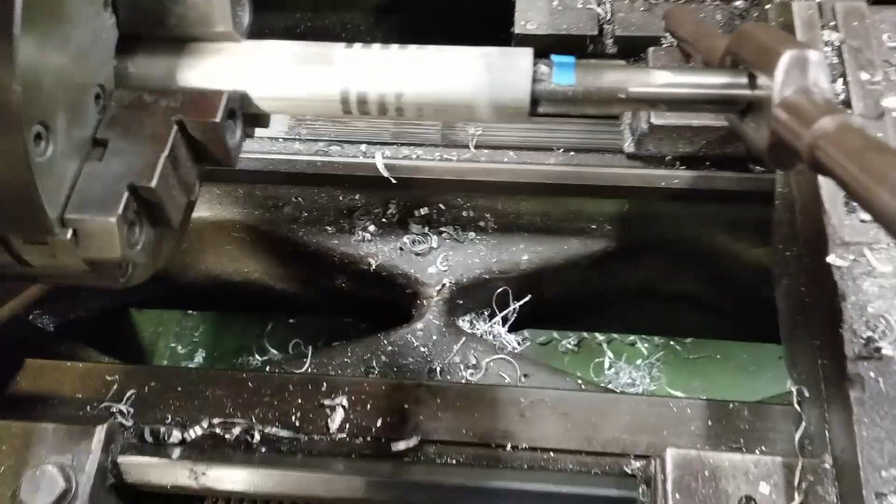Do not drop this. Alright, here's our compressed air, our little hooky on-off button here. So that's on. Don't ever aim this at anybody—you'll be out of the shop for a long time. So, if you could go ahead and put it in here.

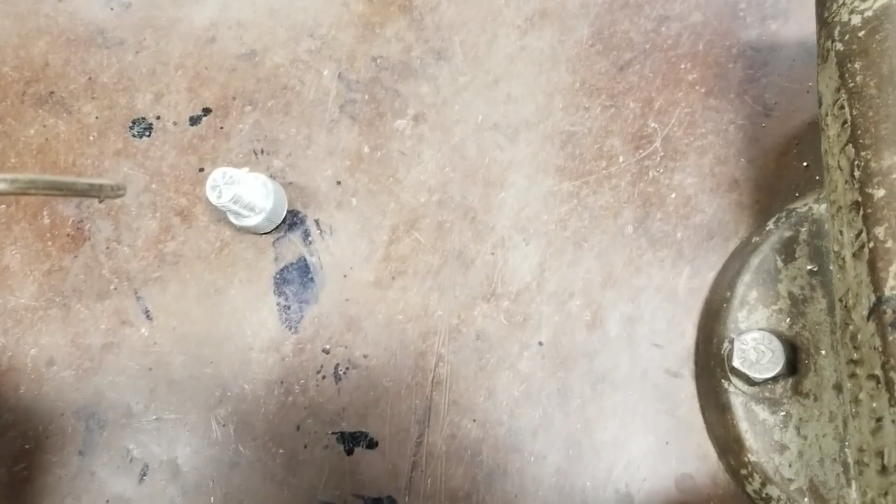And also here. Alright, I had to put the tap in a second time with a little lubrication, blew it out, and then I got it to close. So the next step is we're going to clear up this little flaw right here with a right-hand cutter. So it works tight, this is tight, this is tight.

Now, if for some reason you cannot unscrew this and it's hard, come get me for assistance. There's a trick to getting this off. You don't want to put a wrench on here and ruin your knurling. Okay, it's important. So now I'm going to go ahead and take this off. Save this for later. And you'll see that we verified the threads, we applied the cap, and then we removed it.

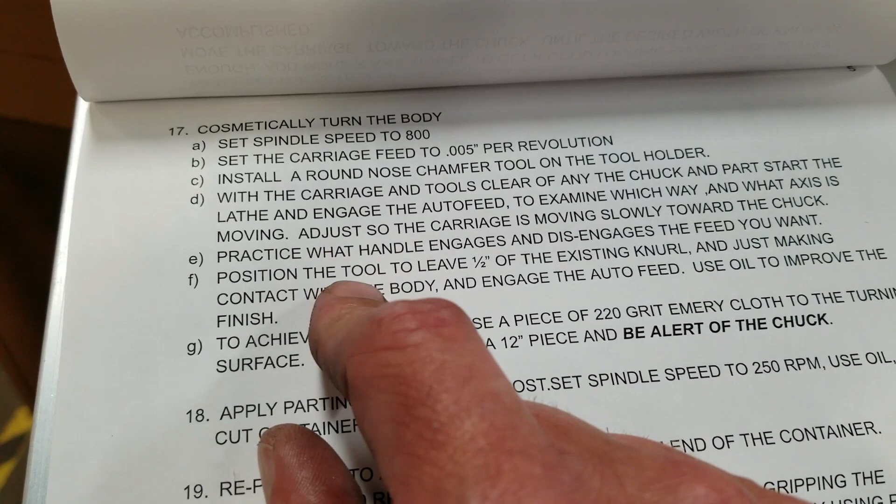And now we're going to basically cosmetically turn the body. Set the spindle speed to 800, set the carriage feed to 5 thousandths per revolution, install round nose chamfer tool on the tool holder, and basically we're going to do auto feed. If you don't want to do this part, you can do it manually, but it's very good to learn how to use the auto feed. But you really have to have your game on, because this is going to be automatically moving towards the chuck, and it could crash in here.

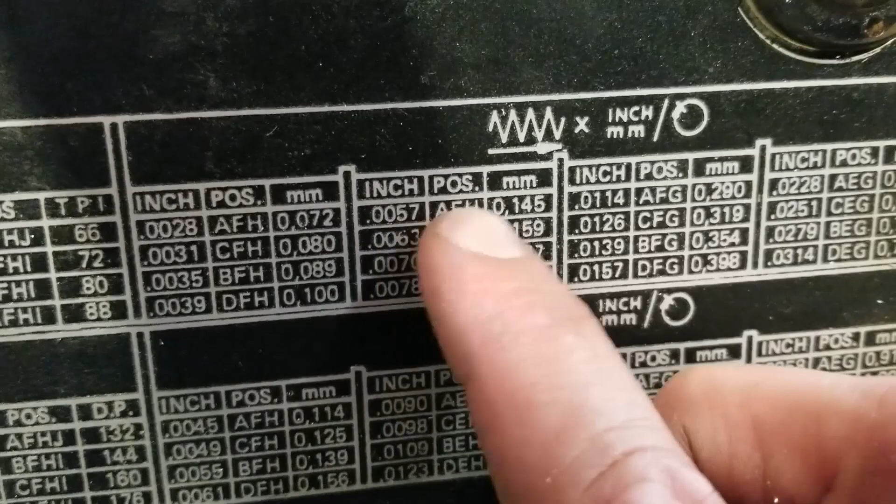Alright, we have a round nose chamfer tool here. Alright, don't forget RPM 800, feed 5 thousandths. So on this machine, that right there is just over 5 thousandths. It says AEH, and it has that icon there. So what that means is right here, I put this at A, I put this at E, put this at H, and I put this thing with that threading looking icon. So that's how we get 5 thousandths. But essentially what you want to do is have the machine move slow.

Now, again, this is sticking out about 3.5 inches because our body's 3 inches and we don't want to run into the chuck. We're applying pressure against this, and so in this case it'd be very wise to put in a live center. This part rotates, and so basically I'm going to lock this in, and I'm going to engage this, and once it's engaged I'm going to lock this in, and so when I turn it by hand you should be looking for this moving. So now I've supported this right side, so if I apply pressure way on the outside here it's safer.

Could you do it without it? You could, but the longer your stick out, the more critical it is. It depends on the thickness of your metal and what type of metal, but when you're out 3 times the thickness of your material, you should be thinking about supporting it to be safe. So I got my tool in here. It's a round nose chamfer tool, and you might be able to see it, but I did mark it at 1/2 inch here. And so basically, I'm going to get this thing lined up at 1/2 inch.

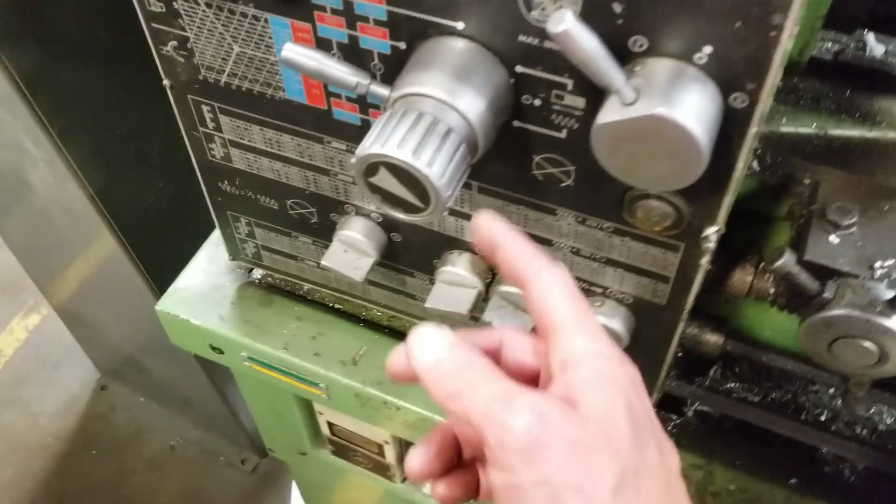But before I do that, you want to practice with the auto feed. And you definitely don't want to have this thing be close because it could take off right towards the chuck. So I would say move the carriage away from the chuck. You don't want this to touch that. That's the danger. On this particular machine, this knob here does one direction, neutral, the opposite direction. So that controls which way.

And then when I turn it on, this is spinning. And if it wasn't spinning, like if it's just off, so these basically do auto feeds. And then there's some knobs over here. Every lathe is a little bit different. But on this one, if I pull this up, that starts moving. See it? If you want to go the opposite direction, rotate this. Also, I can move this knob in, and that moves that knob. Okay? And so, just get a feel for starting and stopping it.

It's really important. Alright, so I have my mark a little more clear now. You can see it. It's lined up, 1/2 inch. And I'm going to go ahead and stop it when I get close to the chuck. Really have your game on. You have a text message, your phone vibrates, just ignore it. You really have to focus here. Alright, so I'm going to turn it on.

Okay, I just started to touch the metal, so I'm going to go ahead and set my 0 here. And we want it to be a diameter of 975 thousandths. We started off with 1 inch, so we have 25 thousandths to cut. So I think we should cut 20 and then take a measurement and then do a finishing pass. So here we go.

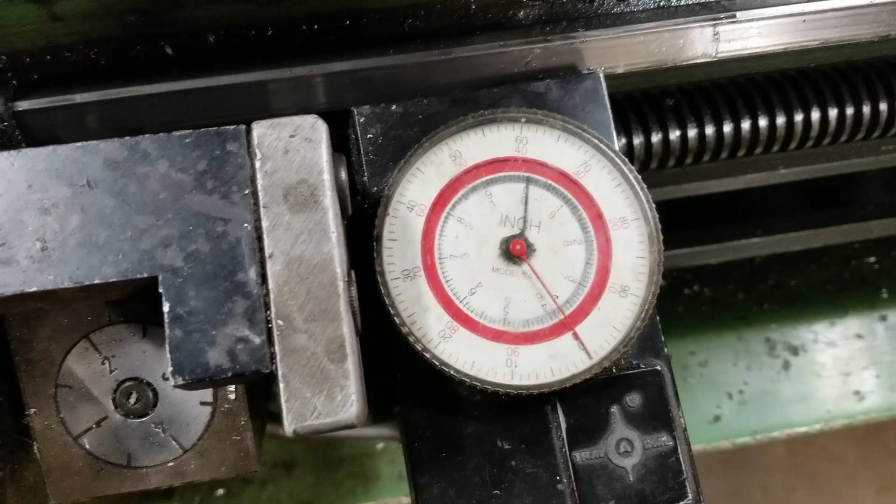Next thing here is we're going to go over here and, okay, I have my parting tool set up like that. My travel dial is set at 0, and I'm going to go over 3 inches. I said earlier the inner dial is for inches, so we can easily go over quickly without counting every revolution until that black needle is at 3. And then we know where to go back a little bit. Alright, so we're at 3 inches here.

Are we parting close to the chuck? Yes. Do we want this here when we part? Definitely not. We want this to fall to the ground. It's very important. So we're parting close to the chuck. We've got to lower the RPMs down. So let's go down to about 200 or so.

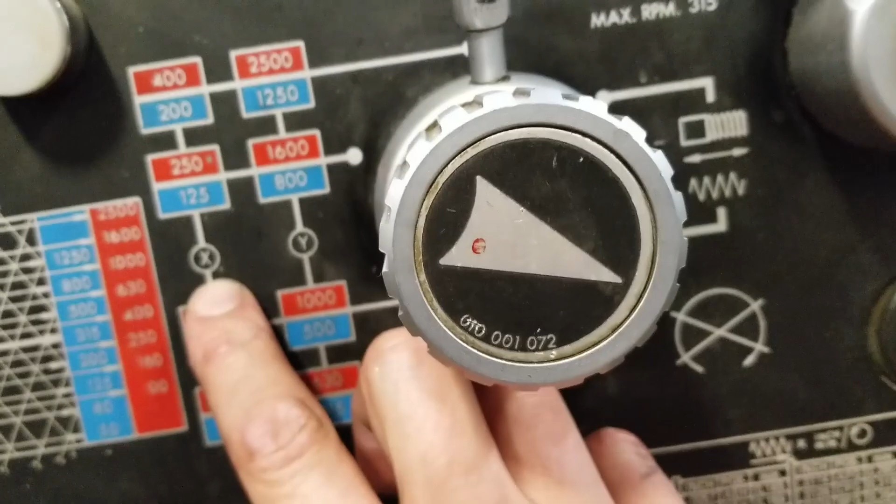So I have to move this. There we go. It's at 200. It's on the X. 200's on the X, and it's a blue number, so we're at 200, and we can use a little bit of cutting fluid. This is tight. That's tight. We're square. Okay.

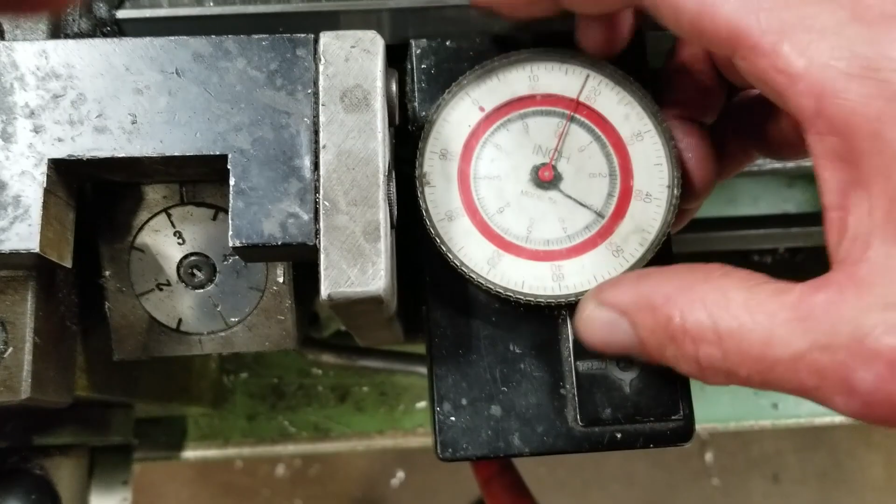We could stop here and put our chamfers in, or we could do it later. If you did it now, we could go ahead, let's just do it really fast. And we have to have one 1/2 inch over to the right or at 2.5. So go ahead and set this to 0. And I'll go out 1 full revolution and go over 5. 1, 2, 3, 4. That's right there.

And we're nice and slow here since we're on the edge. Back right where we started, we left off right there. And part it all the way through, no live center. Could be hot.

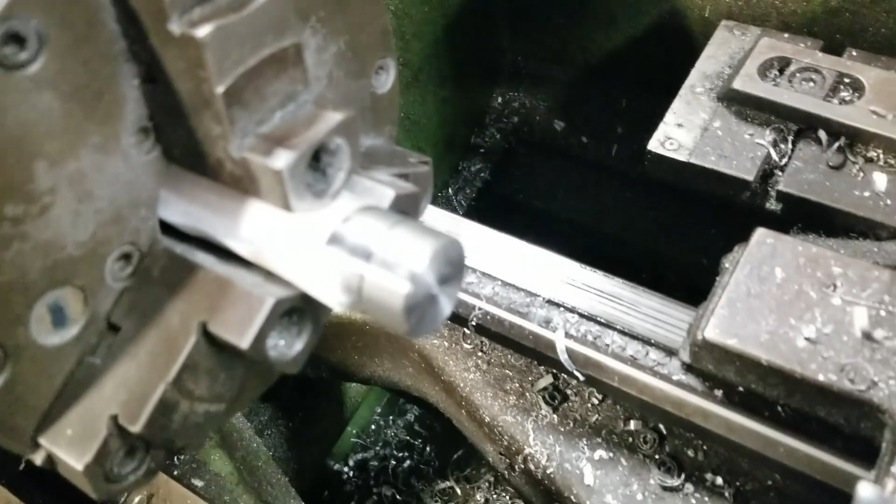Could have done that auto feed if you wanted to, but clean up that mark right there. Alright, go ahead and grab an O-ring there and screw it on. Get your grading card, and then we'll be basically measuring this and making sure it meets the tolerances.